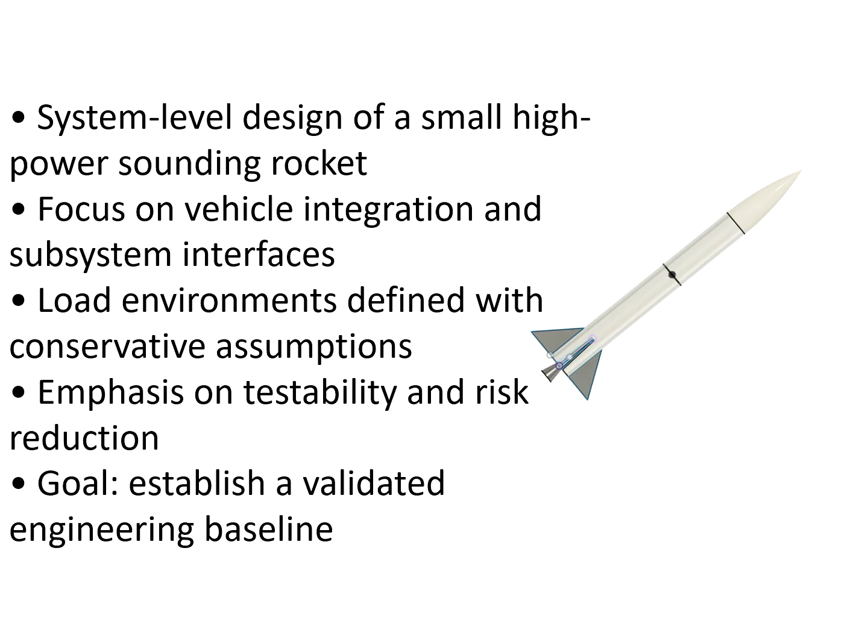The emphasis is on clear load paths, predictable subsystem interfaces, and testability, rather than peak performance optimization. The objective is to establish a coherent engineering baseline that can be incrementally validated through static test, ground-level subsystem testing, and staged flight campaigns.

The mission objective is to build a reusable sounding rocket for low-altitude experimental flights that can be repeated frequently under controlled conditions. A target apogee on the order of 1 km constrains the flight envelope to subsonic and high subsonic speeds, reducing aerodynamic and thermal uncertainties while remaining technically meaningful. The mission prioritizes repeatability, operational safety, and measurable outcomes over maximum altitude.

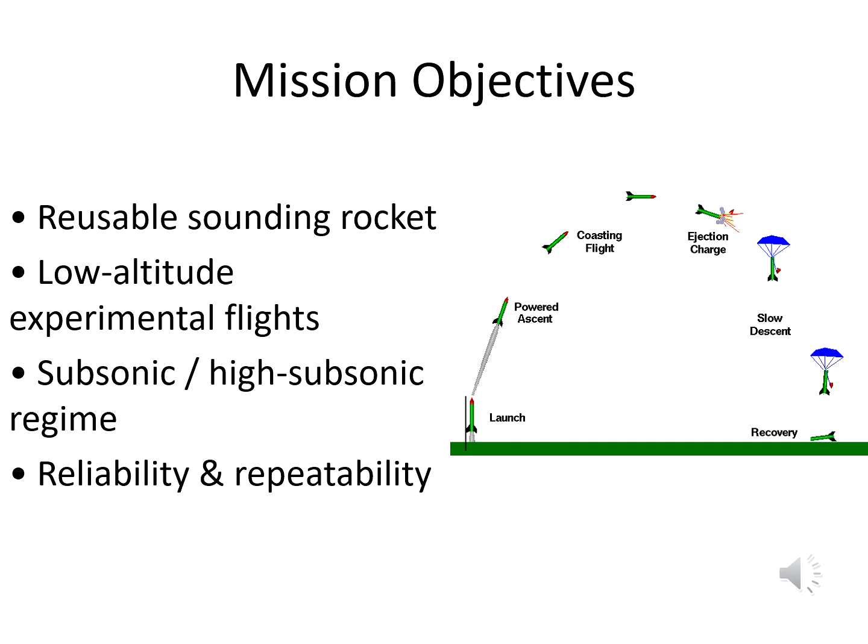This envelope supports disciplined iteration: define requirements, build a prototype, test the highest risk functions on the ground, and then expand the flight envelope only after evidence supports it. Success is evaluated by stable behavior and recoverable hardware rather than a single maximum altitude attempt. The chosen envelope aligned with practical constraints, launch site rules, and recovery area limits.

The vehicle is a single-stage, unguided sounding rocket with an overall length of approximately 1 meter and a diameter of 40 millimeters. The liftoff mass is approximately 1.5 kilograms, which constrains the motor selection, structural sizing, and recovery hardware. The vehicle is physically partitioned into a motor section, airframe body, avionics bay, and recovery compartment. These sections define the primary assembly units and determine internal volume allocation, mass distribution, and access for integration and inspection. The overview at this stage is strictly geometric and physical, serving as the baseline for subsequent subsystem definition.

At the subsystem architecture level, the rocket is organized into 4 interacting subsystems: propulsion, structure, avionics, and recovery. Each subsystem has a defined functional responsibility and a bounded interface to the rest of the vehicle. Propulsion defines the acceleration environment, structure governs load bearing and alignment, avionics manages sensing and deployment logic, and recovery enables vehicle reuse. The central architecture principle is limited coupling. Subsystems interact only through well-defined mechanical, electrical, and operational interfaces. This separation allows independent verification of subsystems prior to full system integration.

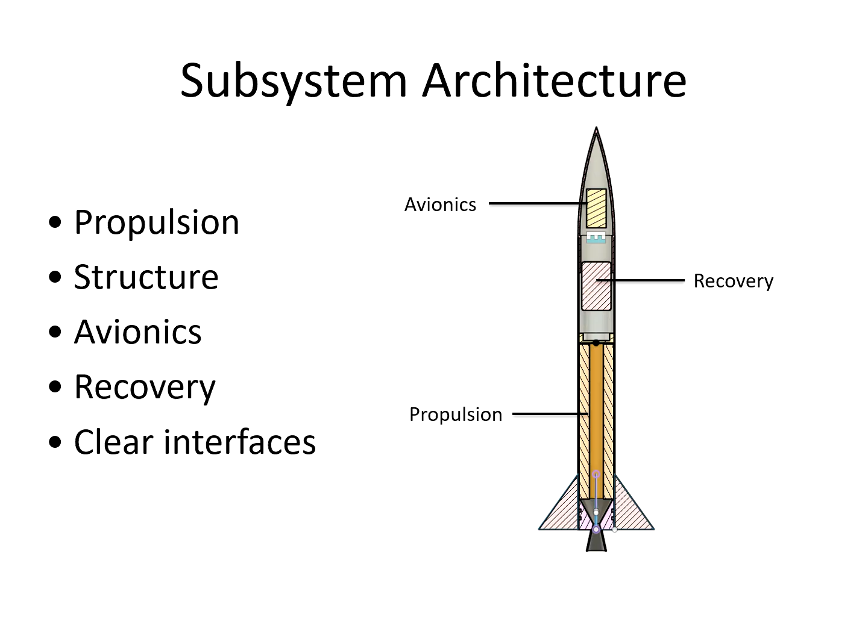The propulsion subsystem is based on an impulser-class solid rocket motor following published experimental designs and validated test data developed by Richard Nakka. The motor is fueled with potassium nitrate dextrose propellant and is selected to meet the required total impulse for the target vehicle mass and apogee. Rather than pursuing custom motor development, the propulsion design leverages established motor behavior to define acceleration level and ascent duration.

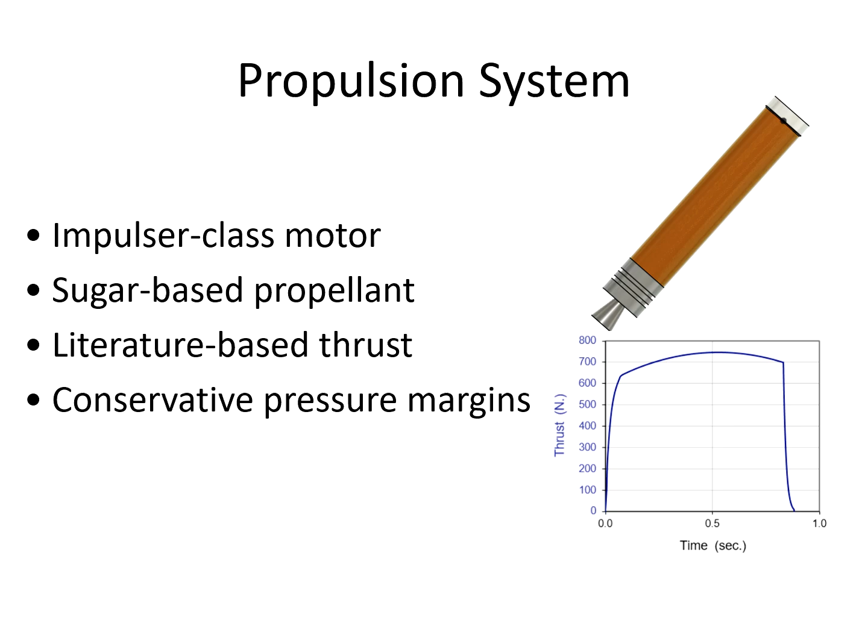Static firing is used as the primary verification activity, providing confirmation of thrust, chamber pressure, and closure integrity, while post-test inspection is employed to assess nozzle erosion and structural condition. This approach allows propulsion-related uncertainties to be characterized experimentally and integrated consistently into an overall vehicle design.

Motor closure is implemented as a bolted joint rather than a snap ring configuration. 4 circumferential bolts are used to improve failure predictability. Axial thrust loads are transferred through bearing at the bolt heads rather than through the threads, reducing the risk of a motor case failure due to concentrated loads. Lower grade bolts of deliberately reduced strength are selected so that in an overpressure condition, failure occurs in the closure hardware rather than the motor casing.

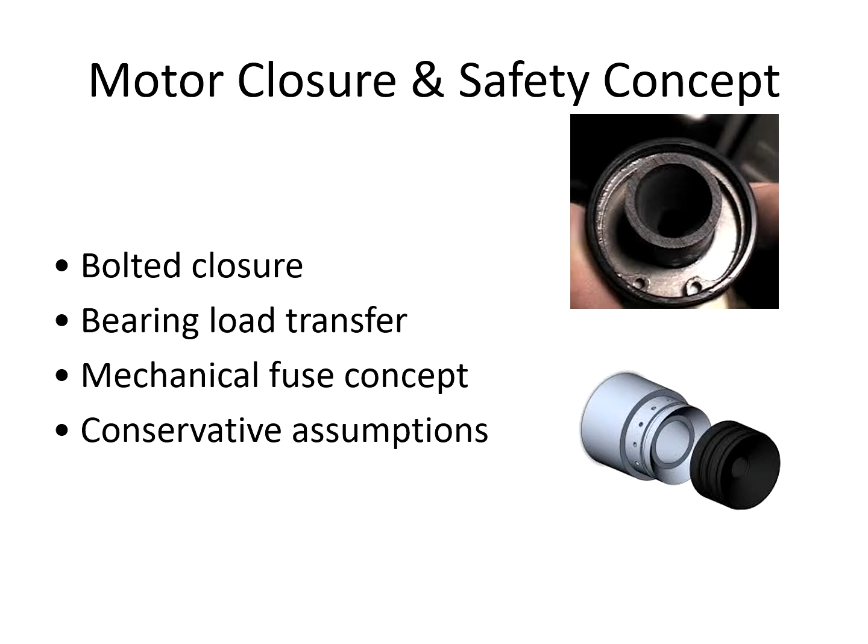Bolt preload is neglected at this stage, and the connection is treated without reliance on controlled torque. This approach allows closure behavior to be evaluated directly through testing rather than inferred from assumption. Post-test inspection focuses on bolt deformation and seating condition as a direct indication of load transfer and closure performance.

Aerodynamic stability is evaluated in OpenRocket using Barrowman-based models appropriate for slender finned vehicles. The configuration is sized to achieve a static margin of approximately 2 calibers at liftoff, providing stability tolerance to uncertainties in mass distribution and aerodynamic coefficients. This margin is selected to balance competing effects, avoiding insufficient stability that may lead to divergence or weathercocking, while limiting drag and fin loading penalties associated with excessive margin.

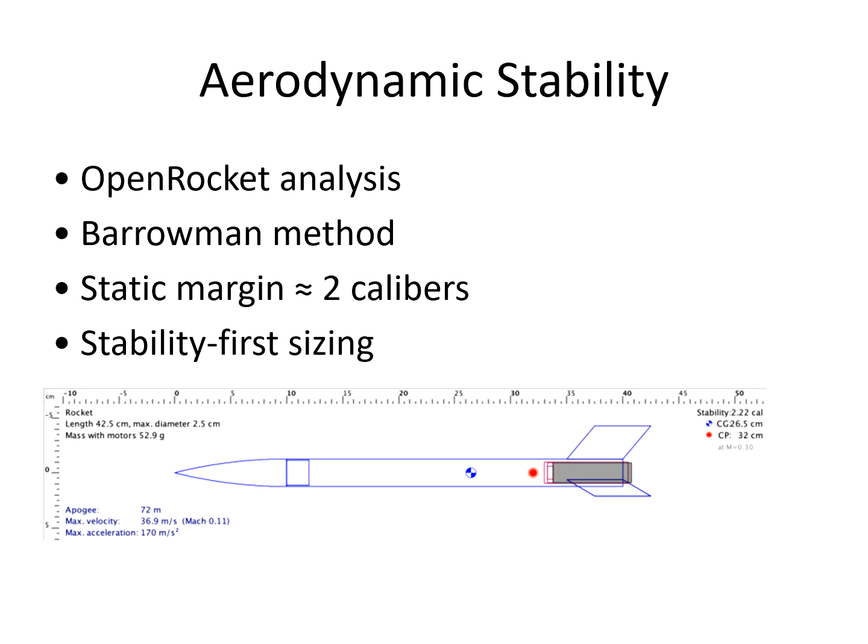Stability sizing is treated as a baseline design constraint rather than an optimization target. The analysis directly informs integration decisions including internal mass placement, motor position, and fin geometry. Sensitivity checks are performed by perturbing mass and fin parameters to verify that positive stability is maintained under assembly variability. The resulting configuration ensures stable behavior through rail departure, boost, and early coast.

CFD is applied only when it directly informs design decisions. Steady-state compressible simulations are performed for internal nozzle flow to examine gas expansion and internal pressure distribution relevant to structural interfaces. The results are used to verify consistency with analytical expectations by confirming chamber-to-exit pressure trends and assessing the plausibility of assumed operating conditions. CFD is not employed for thrust optimization or external aerodynamic prediction.

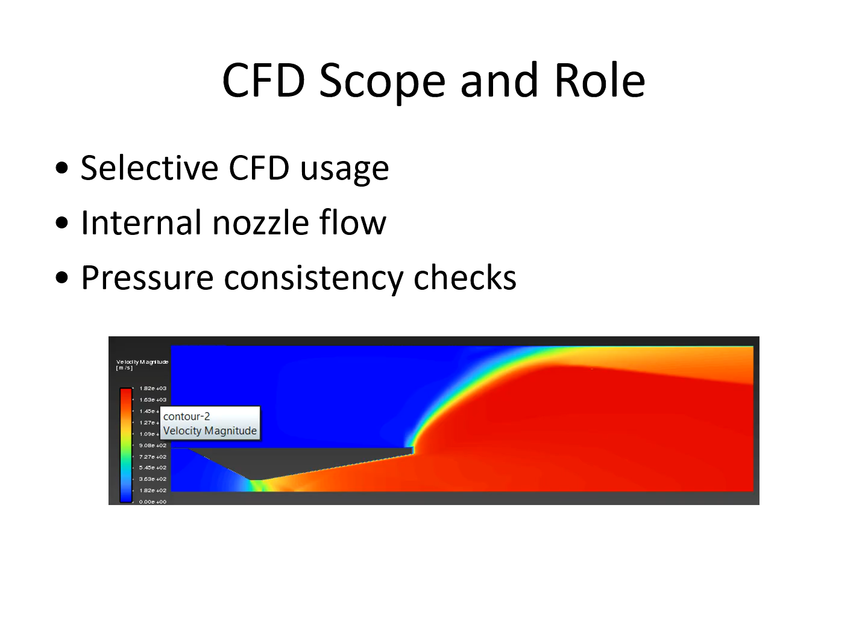External flow analysis is omitted at this stage because the vehicle operates in the subsonic regime where global aerodynamic loads are adequately captured using analytical and semi-empirical methods. The primary CFD outputs are wall pressure distribution and integrated loads on nozzle-adjacent components, which are used to cross-check structural pressure assumptions. Numerical settings are selected to ensure stable convergence and conservation.

The structural concept is based on a thin-walled cylindrical airframe designed to carry axial thrust loads and bending loads induced by aerodynamic side forces. Stiffness is prioritized to maintain alignment of internal components and to ensure reliable recovery deployment under combined acceleration and vibration environments.

Structural evaluation focuses on representative boundary conditions at the motor interface, airframe joint, and avionics mounting locations rather than detailed material-level optimization. Load cases include axial compression from thrust combined with lateral loads representing aerodynamic bending, with conservative magnitudes applied to reflect uncertainty. Reported outputs include global deflection, peak stress at joints, and localized stress concentration. These results are used to identify where reinforcement is required to improve robustness, with mass optimization deferred to later design stages.

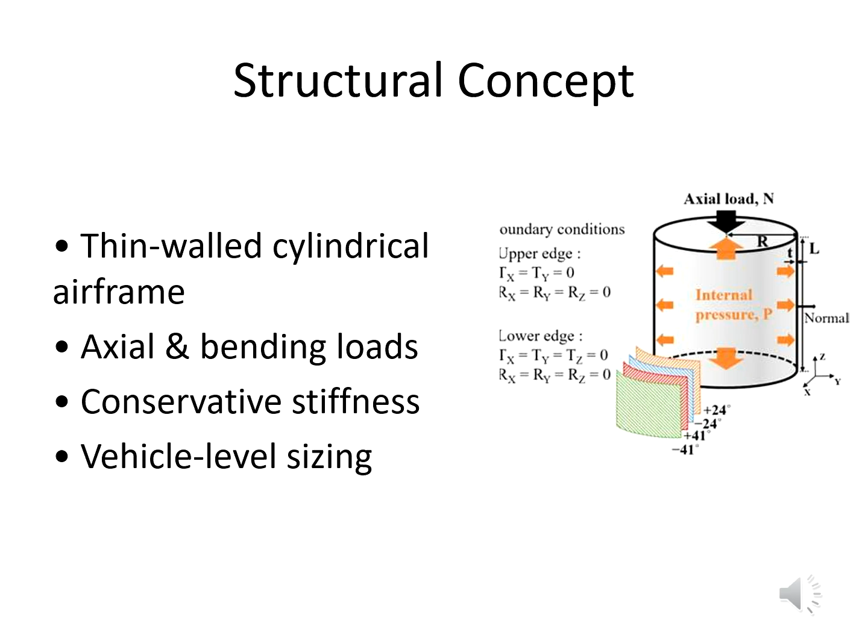Recovery is implemented as a single-stage parachute system deployed near apogee to ensure safe descent and enable hardware reuse. Recovery is treated as mission critical because deployment reliability dominates overall risk in small sounding rockets. The design therefore emphasizes robust mechanics, clean routing, adequate ejection energy, sufficient volume margin for packing variability, and interfaces that are tolerant to vibration and acceleration. Deployment timing and arming logic are coordinated through avionics, but the mechanism is designed to function without fragile tolerances.

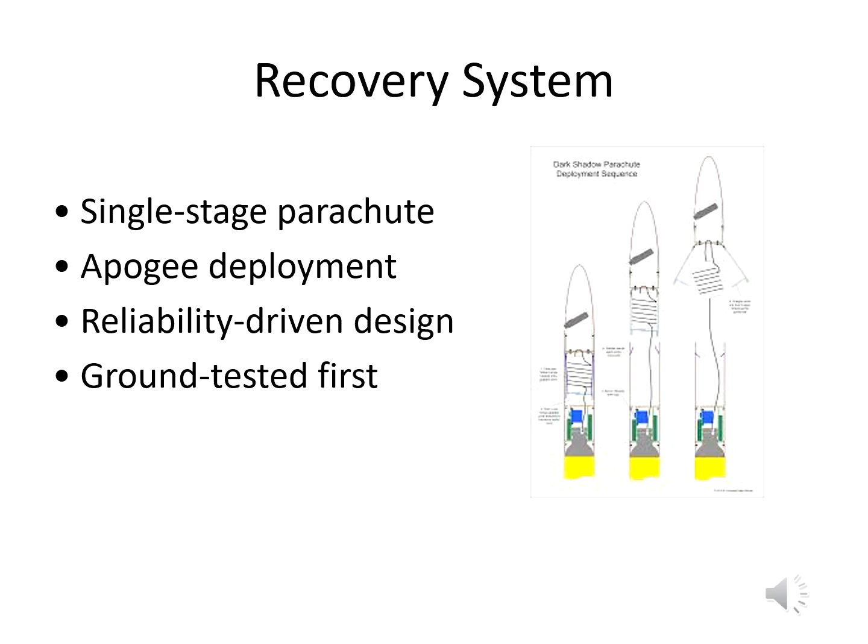Verification is staged: ground deployment tests with representative packing, environmental checks for friction and binding, and inspection after each test. Performance requirements are expressed as repeatable deployment success over many trials. This subsystem drives packaging constraints and stiffness requirements upstream.

The project is currently at the completion of the preliminary design and analysis phase, with subsystem interfaces defined and load envelopes established for the first integrated prototype. The next phase is experimental validation, starting with static motor testing to confirm thrust and chamber pressure assumptions, followed by ground recovery tests to evaluate deployment reliability under realistic packing and hardware tolerances.

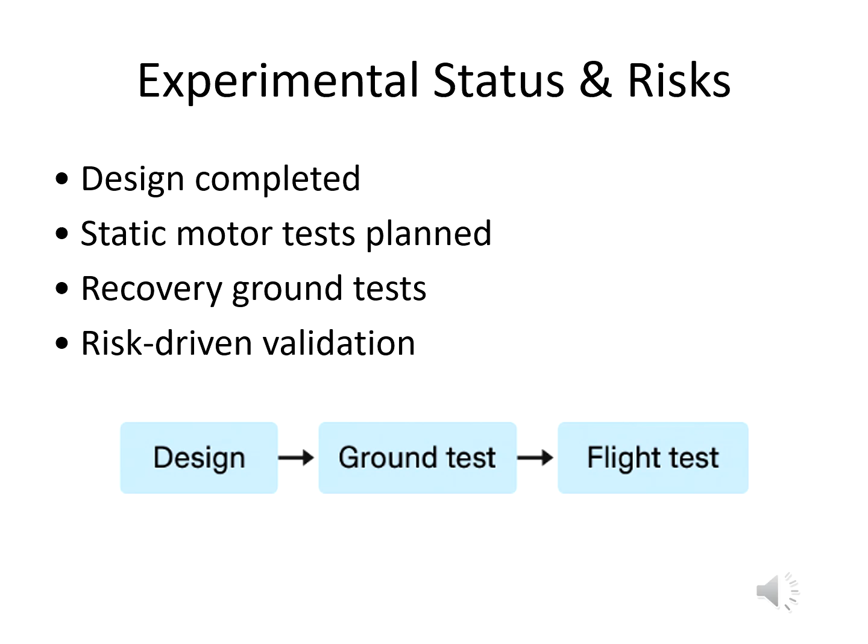The dominant risks at this stage are recovery deployment performance, manufacturing tolerances affecting fit and alignment, and uncertainty in aerodynamic side loads during ascent. These risks are addressed through a structured test sequence in which subsystems are verified individually before progressive integration and flight testing. Success is judged against predefined criteria, including measured thrust and pressure within bounds, repeatable recovery deployment, and inspection showing no evidence of progressive damage.

In conclusion, the work delivers a coherent vehicle architecture supported by explicit assumptions and targeted analysis. Propulsion selection, stability sizing, and structural concepts are defined to enable practical fabrication, integration, and repeatable testing. Limited CFD is applied only where it informs nozzle interface pressure behavior and improves confidence in internal pressure environments. External aerodynamics are addressed with established analytical tools appropriate to the flight regime.

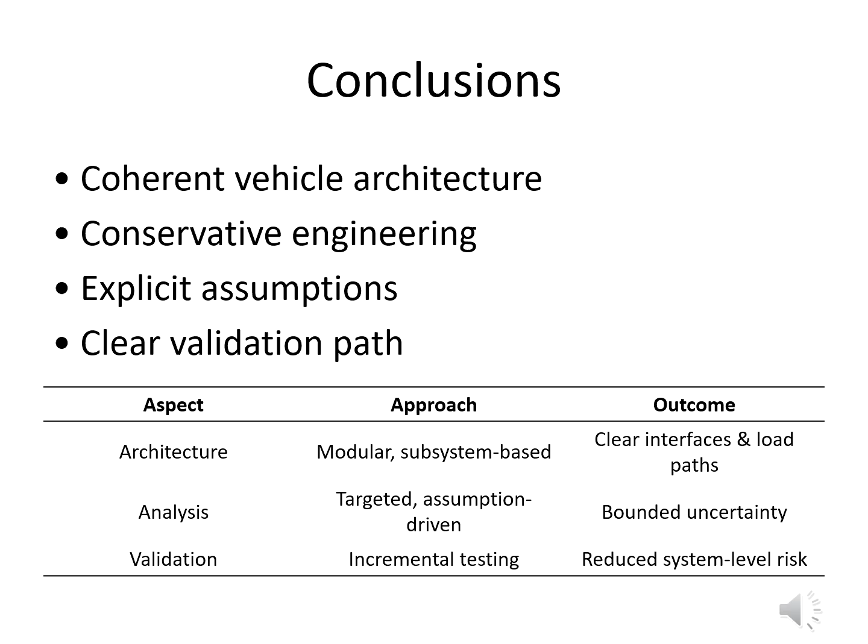The outcome is a design baseline with clear interfaces and bounded loads, prioritized through static testing and ground validation before flight. Future work follows a validation sequence: update mass properties with measured hardware, refine stability with as-built inertia, and extend analysis to external CFD or aeroelasticity only if test evidence motivates it. Clear acceptance criteria guide each step. This keeps scope aligned with available resources.